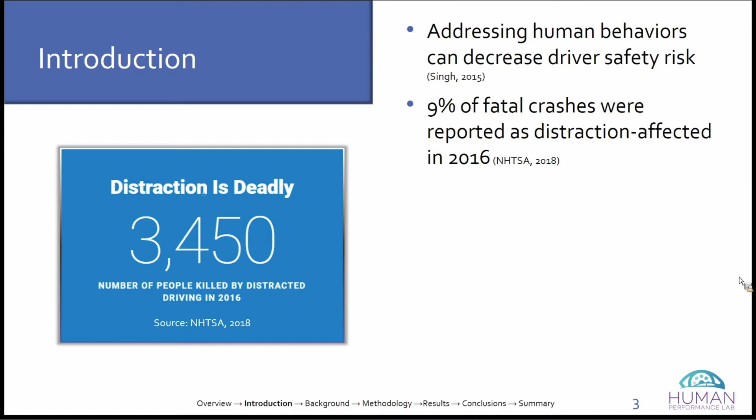So to begin, I'm going to talk about why this is important to study. So we understand that addressing human behaviors can decrease or, in other words, increase driver safety risk at the same time. So it's important to understand what we can change in the environment to make the road safer. So we also understand that distraction is a large cause of fatal crashes, reporting 9% in just 2016 in the United States. At the same time, we have drones or unmanned aerial systems that are being increasingly used near surface transportation for traffic monitoring, agriculture monitoring, collecting data, and hobbyist use in other ways as well. So with those two, we have to understand how drones have the potential to distract drivers if they're flown near the roadway.

So this study also happened around the same time I was beginning a different project for MassDOT that focused on collecting speed data using UAS. And this specific study is just one example of how drones can be used to collect efficient and helpful data near roadways. So we don't want to discount flying drones near roadways in all cases, as they can collect detailed data through vehicle tracking to help set speed limits, to assist in road safety audits or corridor studies, just to name a few.

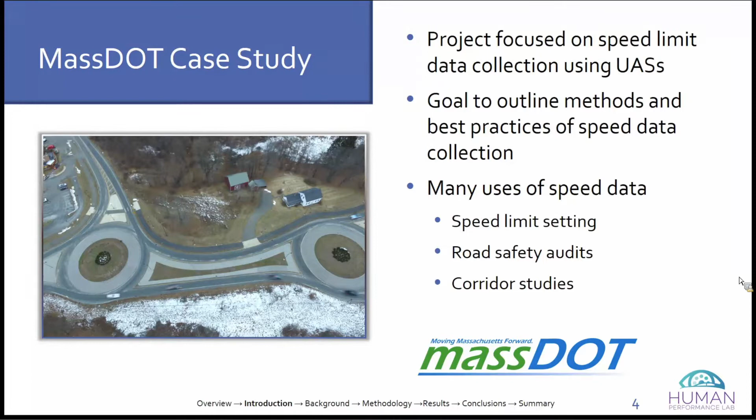So the specific scope of this research and the objective was to study driver performance in response to drone presence in the vicinity of surface transportation under different scenarios. And those specific scenarios are based off of what we've understood in literature so far. So the initial objective before we developed this study was to understand how drones are currently being used near surface transportation and how they are intended to be used in the future. So we really have to understand the potential concerns that we may have with drones being flown near surface transportation. And so from here, we understood that we needed to understand how drones impact driver performance in terms of their visual attention, their speed, and their lateral position due to a number of variables.

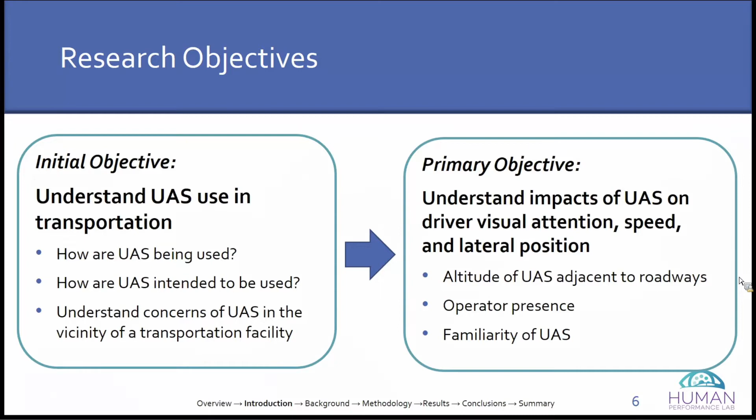So the scope of this research specifically focused on drone height. So does the height impact driver performance? Drone location on a roadway, and whether the operators are present or not with that drone flight. Examples of drone variables that we didn't study could be the size of the drone, so how large a drone is, or the color, as well as the lateral position from the roadway and motion type, among others. There are several different ways in which you can fly a drone, and we really only focused on a specific scenario.

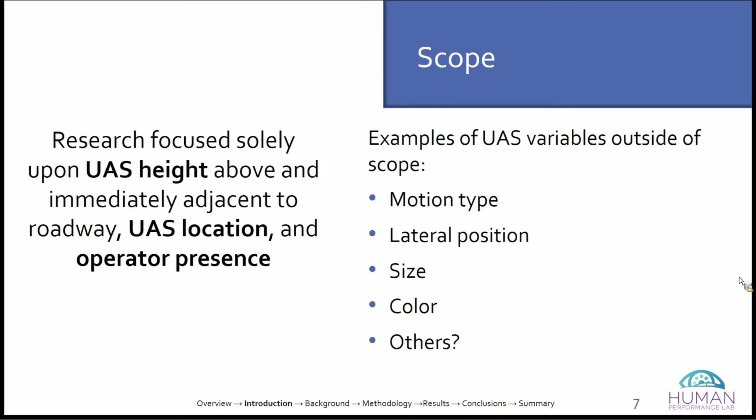So now I'm going to go into the background of why distraction is important to understand from a general perspective, an external distraction perspective, as well as drone regulations that exist in the US and globally today. So distracted driving is essentially any activity that diverts attention away from driving, and these can be broken into three different types. So we have visual distraction that takes your eyes off of the main roadway, manual distraction that takes your hands or other physical features away from the driving task, and then you have the cognitive distraction that takes your thoughts away from the driving task.

So in literature today, we really do understand internal distractions are a significant problem. Cell phone use, for example, talking to friends in the car, for example, are well understood in literature. However, external distractions have been less concentrated on in recent years. And that's really what this research takes on. So external distractions typically take the form of a visual distraction. And in the late 1990s, external distractions were identified as contributing factors to about 30% of all crashes. And with more external distractions potentially existing today, this number may have risen, though there aren't any current studies that look at external distractions in the way this study did.

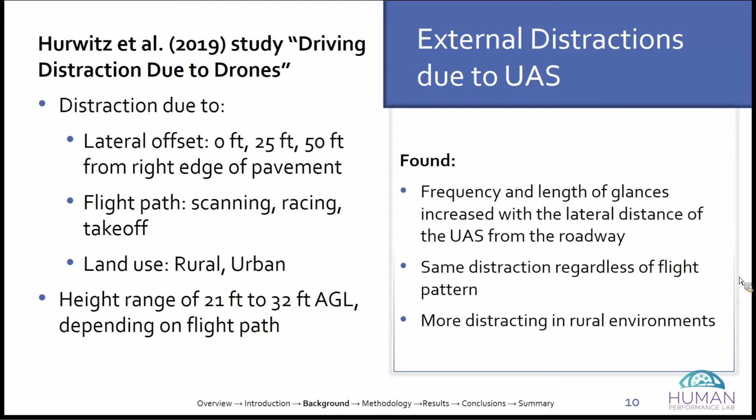So to jump into regulations that currently exist with drone use in the United States, there are a number of regulations: drones must be under a certain weight. They must be within visual line of sight of the pilot or their team member, their visual observer. They can't be flown over a certain altitude, and you must have a license to operate.

You must have a commercial license to operate a drone, and that's this picture here. You only have to pay around, I believe it's now $150, and it must be updated every 2 years, and it's a test you take. However, the biggest regulation that exists related to flying drones near the roadway is this one, that operations cannot be flown over human beings or over moving vehicles.

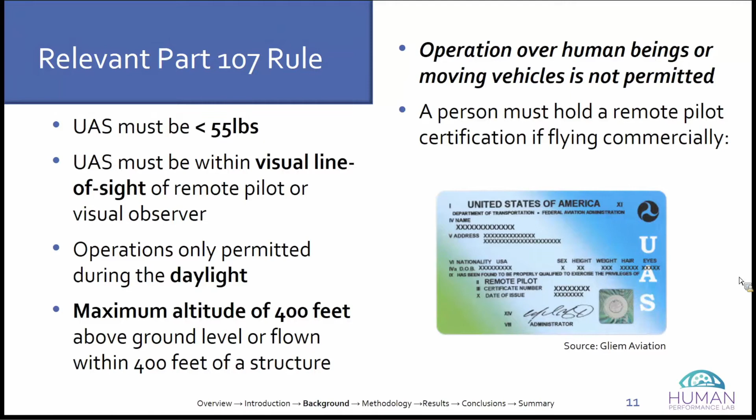So this study took place in the Human Performance Laboratory on the UMass Amherst campus using a 2013 Ford Fusion simulator with 330 degrees of view and an eye tracker device. And the software we used to develop the simulation was Real-Time Technologies Incorporated. And then we followed up with a Qualtrics survey to collect demographic information as well as their experience in the simulator as well as their perspective on drones. And I'll go into the details of that.

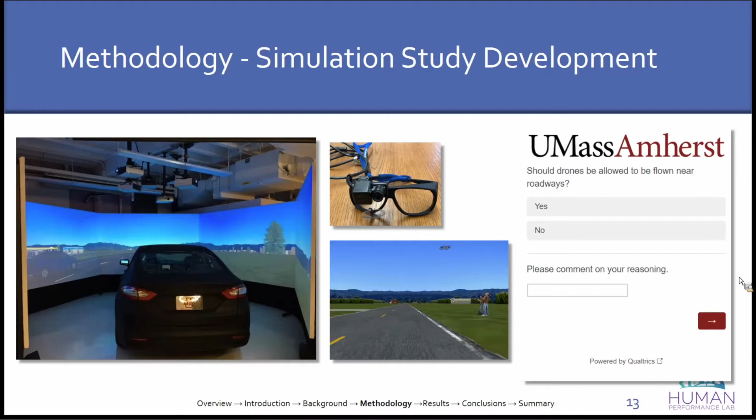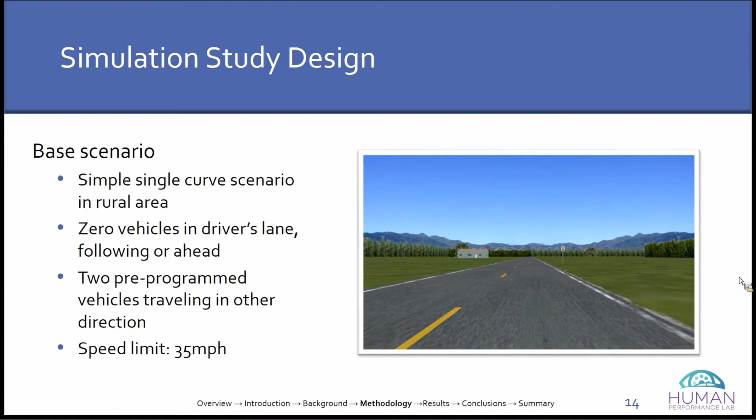So our base scenario was a simple curve design. So you'd go straight, you take a right curve and you'd go straight from there. And this was to make sure that the drivers couldn't see the drone from the beginning of the scenario when they first started. It took place in a rural area, with a couple pre-programmed vehicles traveling on the opposing lane to make it seem more realistic.

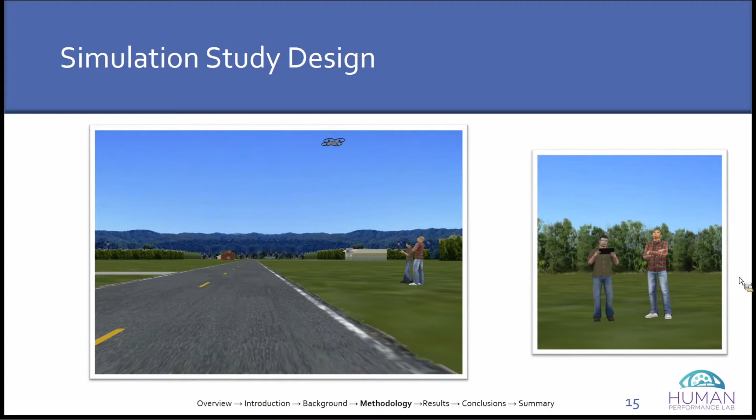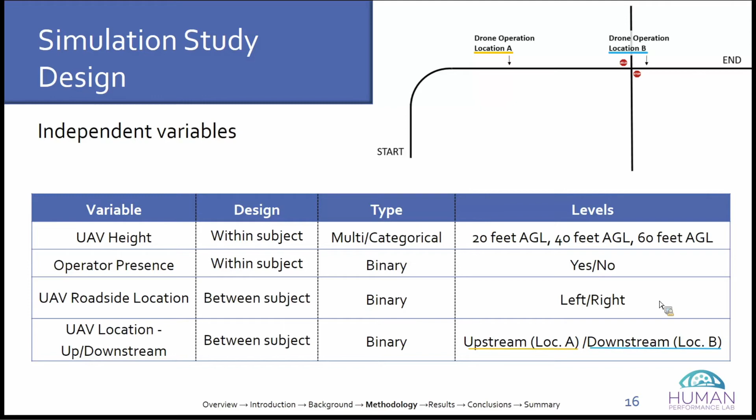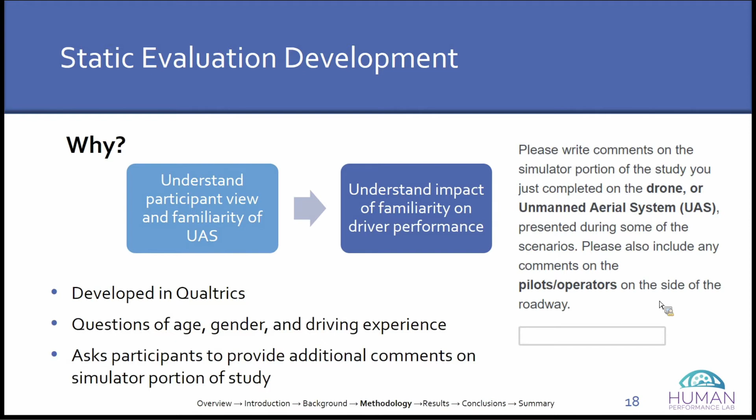Okay, so study design: upstream and downstream location, which I had mentioned, to minimize biases in the study. So we had 3 dependent variables: speed of driver, lateral position, and eye glance behavior. And we also included a static evaluation. And this was really to understand participant view and familiarity of UAS, to then understand the impact this may have on driver performance around a drone. And this was developed in Qualtrics. We asked questions of demographic information and other specific questions regarding the study.

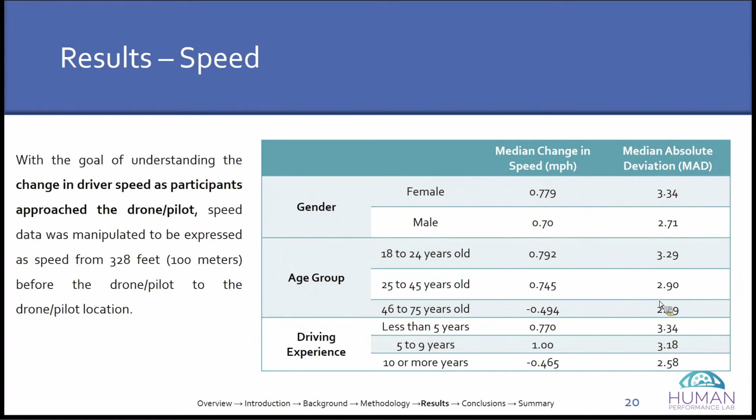So in terms of the speed results, we calculated the reduction in speed from 100 meters prior to the drone and pilot to the drone and pilot to really understand if drivers were decreasing their speed in their approach to the drone location. And we ran some Wilcoxon pairwise t-tests based on the median because the data was not normally distributed. And we found that gender was not a significant factor. However, age and driving experience was. So the younger drivers tended to go faster, and their speed reduction wasn't as high as older, more experienced drivers.

And this significance likely exists due to the fact that prior studies have shown that younger drivers are less likely to make sound critical decisions compared to more experienced drivers, such as traveling too fast for conditions. We also analyzed the results of the speed in conjunction with some questions we had asked in the Qualtrics survey part of this study. So, have you seen a drone in flight near a roadway? You could either respond yes or no. And should drones be allowed to be flown near roadways?

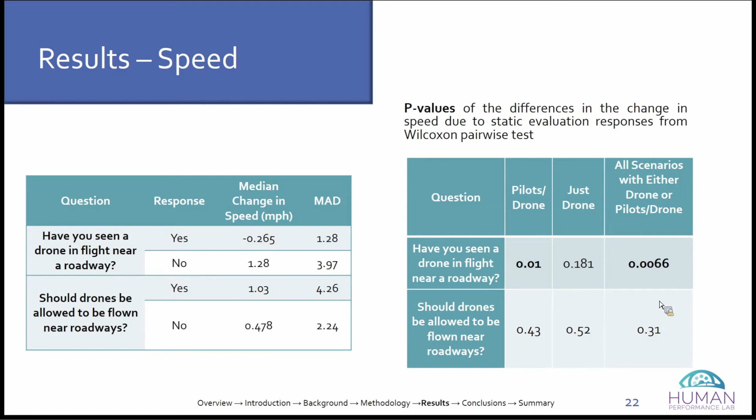And the first question we found was statistically significant in their speed. So those who had seen a drone before in the real world, in flight near a roadway, were statistically more likely to slow down in their approach to the drone compared to those who had not. We found no significance in speed due to drone height or pilot presence, and there was only one significant relationship between the change in speed and the percent of time observing the drone. So if drivers spent more time observing the drone, they had a negative change in speed compared to those who had less time observing the drone.

And this lack of correlation, there's only this one correlation, is likely due to the fact that visual distraction is not usually enough to change average speed. So there has to be more distraction involved for that to happen. In terms of the lateral position, there were no significant results found in any of the right and left scenarios. And this is likely due to potentially the lack of drone movement or the pre-programmed vehicles in the opposing lane. So there could be more studies done on lateral position and drone flights to really understand this better.

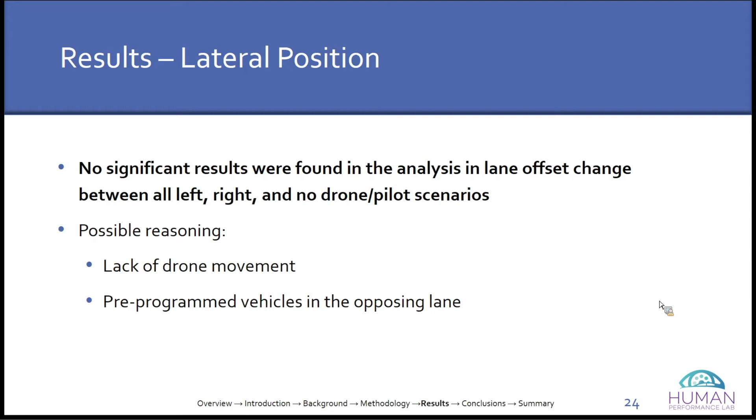Another significant finding was that in only 9 of the 156 analyzed videos, drivers looked back in their rearview mirror at the drone and pilots after passing them. And then in 17 of them, participants looked at the drone or pilot for 2 seconds continuously. Again, that is a critical glance, as this can result in a double risk of a crash occurring.

So briefly to go over the results of the static evaluation, 8 of the 28 participants did note that the pilots or drones could be a distraction without even being asked about distraction, and several others noted that drones or pilots made them look away from the roadway. And of those who had seen a drone before in the real world, which was almost everyone except 1, 19 had not seen them near a roadway. However, 8 had seen a drone in flight near a roadway. So this insinuates that this is happening already.

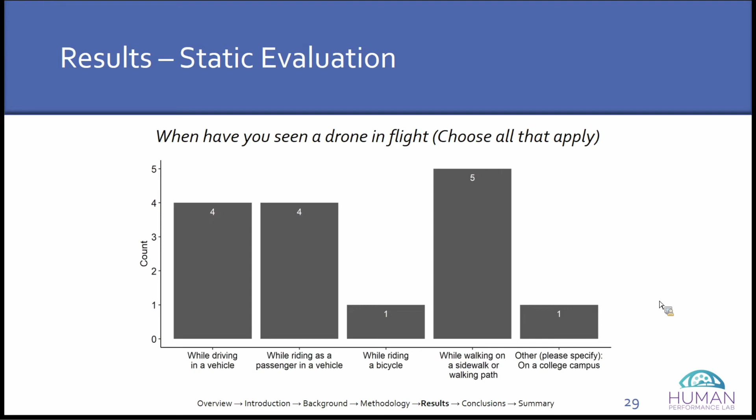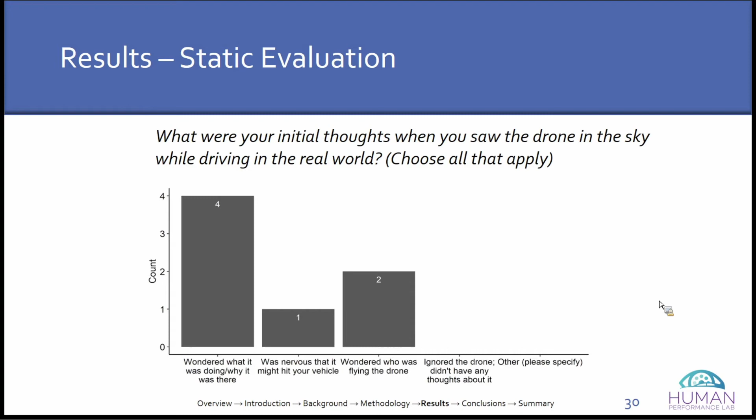Of those who had seen a drone in flight, 4 had seen one while driving a vehicle, another 4 while riding as a passenger in a vehicle, and so on. And of those who had seen a drone in flight while being the driver, all of them wondered what it was doing there and why it was there. 1 was even nervous that it might hit their vehicle. So since they recalled these situations, it is reasonable to think there's a potential for a cognitive distraction, not just a visual distraction, in the presence of a drone while driving. And finally, the final question was, should drones be allowed to be flown near roadways? And there wasn't an even consensus on this one.

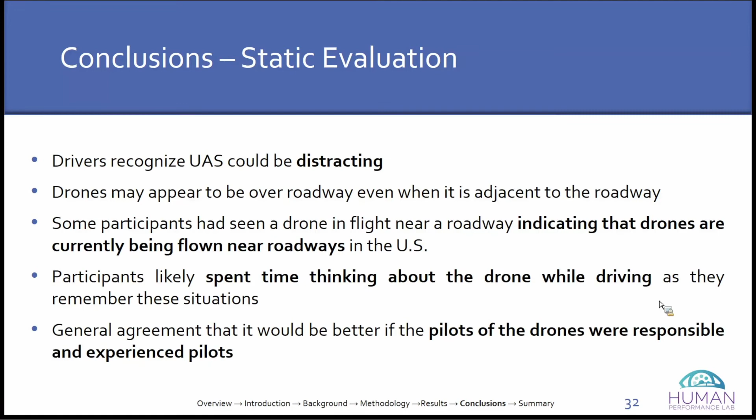So conclusions from the static evaluation: we recognize that drones could be distracting. Drivers are aware of this, and drivers may think that the drone is above them even when it is just adjacent to the roadway. Some noted that in the Qualtrics survey. Some participants had also seen a drone in flight near a roadway, indicating they are currently being flown near roadways in the US. And since participants spent time thinking about the drone while driving and they remember these situations, there is a potential for a cognitive distraction. And generally, there was agreement that if the pilots of the drones were responsible and experienced pilots, they would feel safe driving around them.

And finally, we have driving performance conclusions. So we found that drivers did slow down in their approach to the drones on the roadside if they had previously seen a drone in flight near a roadway before in the real world. So if someone is more familiar with drones, they are more likely to slow down in their approach, or that's what our results suggest. Otherwise, drivers don't really change their speed while passing a drone on the roadside.

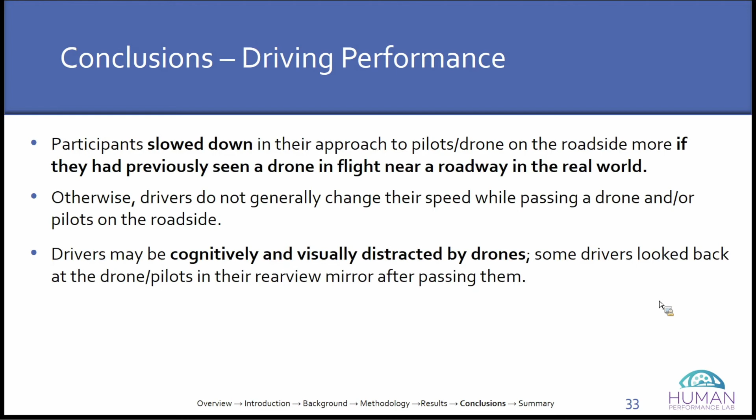So again, I mentioned that drivers may be cognitively and visually distracted by drones, and another reason for this would be that they looked in their rearview mirror after passing them. And drones and pilots were sometimes critically distracting in these continuous 2 seconds or more glances, so this could be a safety issue, certainly.

And then finally, drones were just as visually distracting at any drone height, though we only went up to 60 feet above ground level, so if a drone was flying at a higher height, this could minimize this level of distraction.

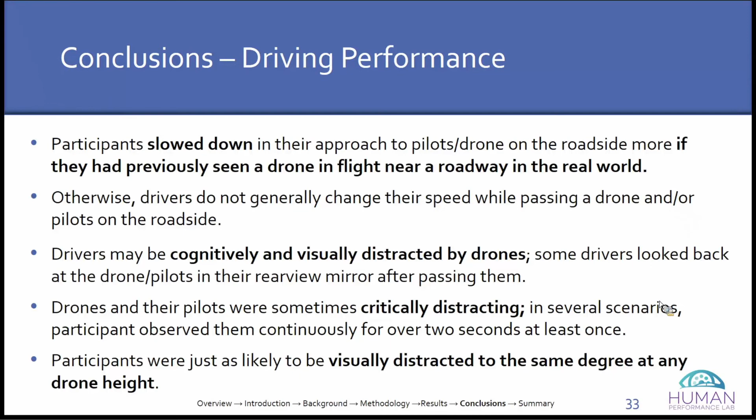So the recommendations of this work are simply that only licensed pilots should be allowed to fly in the vicinity of roadways, if drones should be allowed to be flown at all, and these could come in the form of strict regulations and enforcement on pilot licensing.

And then also, given the amount of visual distraction, it is recommended that policy be created to simply limit the situations in which drones are allowed to be flown in the vicinity of roadways. These could come through in regulations limiting the use of drones, for example.

There are a couple limitations of this study. The within subjects design could cause fatigue effects, though they only participated in 1-minute scenarios, so those were minimized. The heights of the drone scenarios were limited to only 3 different heights, and the overall age of the participants was younger in terms of licensed drivers in the US.

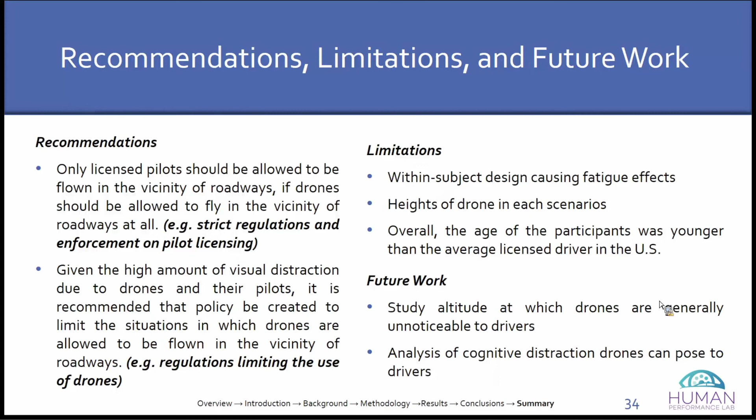Future work could study the altitude at which drones are generally unnoticeable to drivers, where it could be safe to fly. And then finally, the analysis of cognitive distraction, understanding how that could specifically impact drivers.

So there is one more study that recently came out in 2020 by Barlow et al. that studied the use of temporary traffic control devices for drones. And I wanted to add this in here for all of those situations where drones do need to be flown near roadways for work purposes.

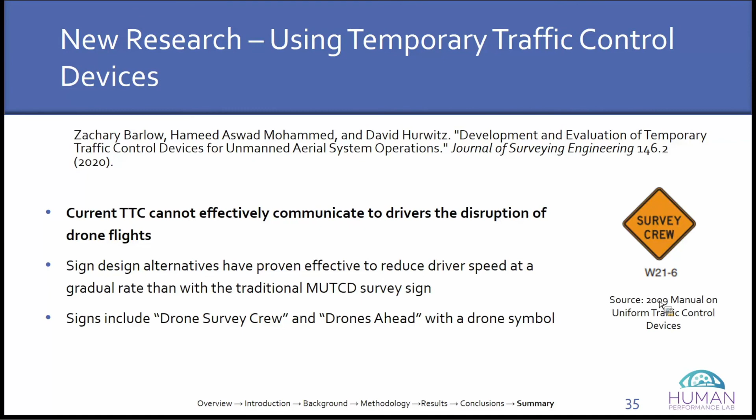And they found that the current survey crew sign in the MUTCD cannot effectively communicate to drivers the disruption of drone flight safely, and they have developed sign alternatives that have been proven to reduce driver speed better than the current sign that exists today. So if you're interested, I recommend checking that out. And this kind of aligns with our study, which said that drivers feel more safe around experienced pilots and those they trust.